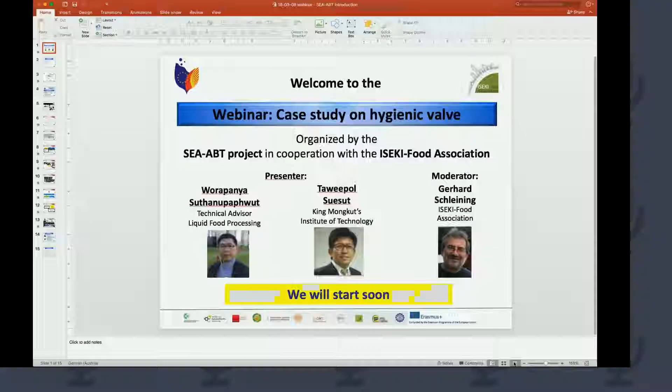Welcome to this webinar. It is given in the frame of the European Capacity Building SEA-ABT, the Southeast Asian Academy for Beverage Technology, and we are using the webinar system of the Iseki Food Association. The topic of today is about the design and use of a hygienic mixed-proof valve, and it is given by Worapanya Suthanupaphwut. So sorry for the pronunciation, but it's very difficult with Thai names. And also this presentation is given in Thai because it's mainly for the Thai people, but it will also be translated by Taweepol Suesut from King Mongkut's Institute of Technology.

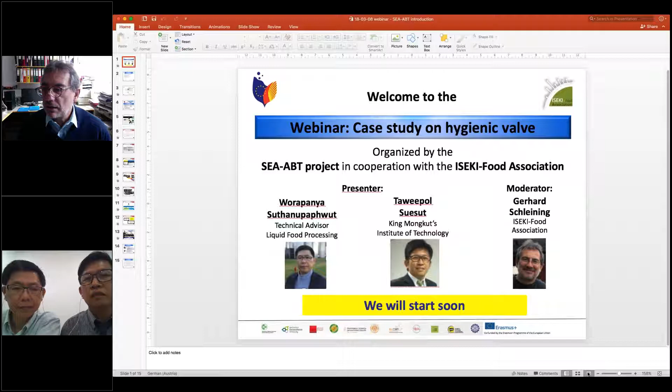Sorry. I hope you can see the presentation. I'm not sure if you only see the first page or if you can also see now the second page, because on the screen it does not appear. Chit, which page do you see now on the screen? Do you see the agenda? Let me check. Or just the front page? Just the first page, not agenda. So, I see only just the first page. So now I think you see the agenda, correct? Okay. Yes, that's right. So if something does not work, just interrupt me.

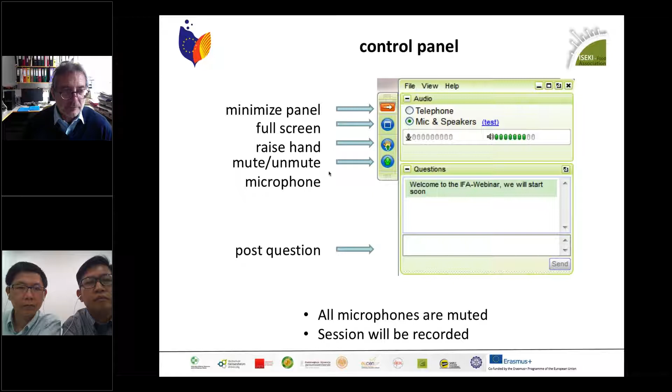Now coming to this project where this activity is carried out, it's in the frame of this SEA-ABT project. It's a capacity building project for Thailand. It's coordinated by BOKU, by myself, and it's implemented by the Kasetsart University by Dr. Sasitorn Tongchit. I'm also here representing the Iseki Food Association because we are supporting this project. We are also partner of this project, and we are supporting these activities with the e-learning platform and with this webinar system.

Just a few words about the Iseki Food Association. Some of you may know about this. This is an independent non-profit organization. It was registered in 2005 after several thematic network projects in order to maintain all the outcomes of the different projects. You can see from this slide that there were quite a huge number of partners involved in these thematic networks. For example, Iseki Food 2, we had 113 partners from 25 countries. And later on, we also could involve other partners outside of Europe from all the 5 continents. So this is where we get also the connection to the Thai universities. And in the meantime, Iseki Food Association is also organizing and participating in other projects, and one of these projects is this SEA capacity building project.

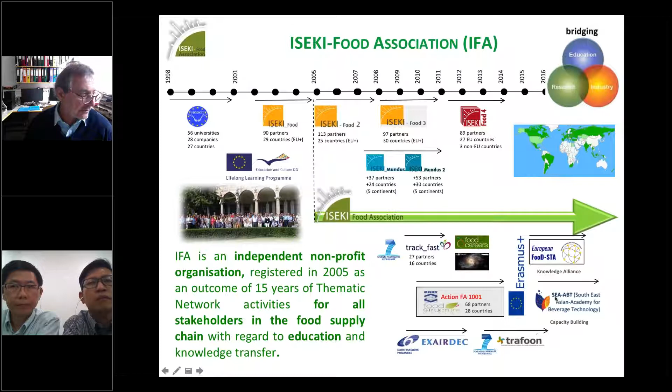This project is a 3-year project, started in 2015 and will end this year. It has a budget of 1 million euro, and we are 9 partners. The aim of this project is to support the Thai universities to establish an education concept for the beverage sector and to improve also the training equipment. By this, we are supporting the Thai companies and stakeholders in the beverage sector, so it's easier for them to find qualified persons, because before this project, the companies had to send their employees to Australia, US, or Europe, and now we are implementing some trainings in Thailand so more people can be trained in this sector.

And also another aim is that we want to build an organizational infrastructure for knowledge transfer and collaboration. We call this the Beverage Academy, which we want to implement. These are the partners. In Thailand we have Kasetsart University, then King Mongkut's Institute of Technology, whose expertise is mainly in engineering and hygienic design. Then we have Chulalongkorn University and also an equipment supplier, Patkol, from Thailand.

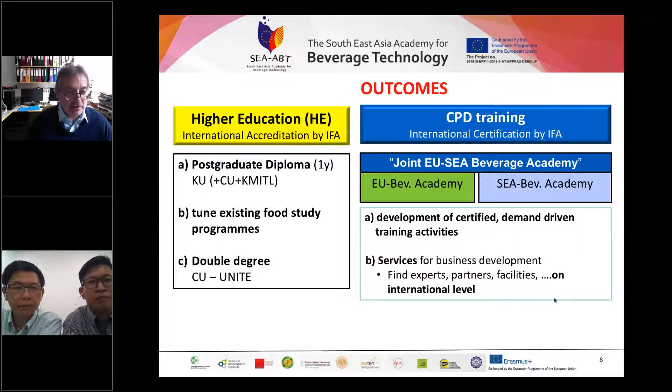For the CPD sector, we are going to establish this academy. There will be two parts, a European part and a Thai part, with an umbrella structure maintained by the ISEKI-Food Association to support both parts, mainly with IT infrastructure. For this academy, we have already developed some trainings. They were carried out very successfully in Thailand, based on the needs they told us, and in future we will also support the Thai industry to find expert partners and facilities on an international level.

So what we did until now: we had brainstorming sessions with the industry to tell us their needs, what kind of trainings they need. Then we made a selection and defined specific topics, and the trainers were trained in Europe, with a training visit at different places. Then the courses were developed. Some of them have been tested, and some will be improved. At the end, they will also get certification to show the high quality of these trainings.

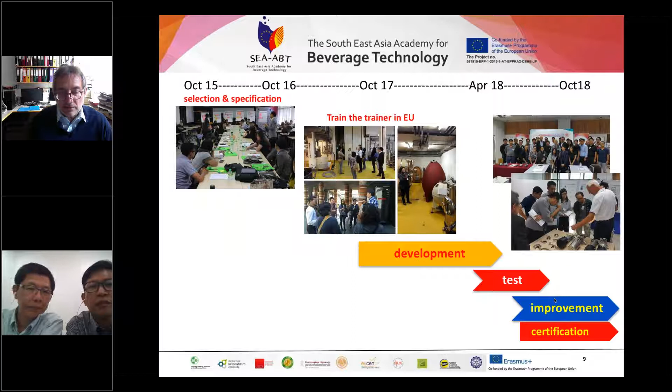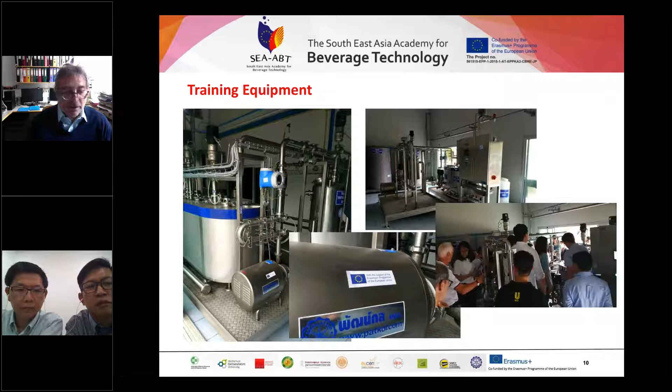These are some pictures of trainings which have been carried out. For example, this is a training from last year on hygienic design, mainly organized by the EHEDG. Important for these kinds of projects is that one third of the budget goes to the target country to buy equipment they can use for trainings. This is an example of a CIP cleaning device which was bought with this project and is installed and maintained at King Mongkut's University, so they can use it for CPD training and for their food study programs.

Again, this is the structure of the academy. We will have two parts, one in Europe and one in Thailand. The academy will also be open to non-partners of this project: universities, companies, not only food producers but also equipment suppliers, training providers, professional associations, governmental and non-governmental organizations. What we expect from these members is that they help us continuously identify the needs, accept students for diploma work and internships in their companies, and be involved in giving lectures at the universities and for continuing education.

For example, our speaker today comes from the industry and is sharing his expertise with us. The benefits of becoming a member are tailor-made, high-quality training for their needs with well-trained trainers, support in business development to find experts and partners, access to equipment they don't have, and training on new technologies in this sector.

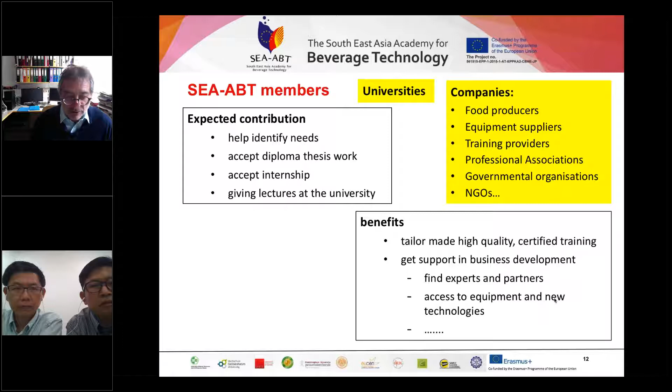So this was everything about the project. Here you can see the main actors from the different universities. And now we are coming to today's topic. If you have any questions about the project or the ISEKI-Food Association, we can discuss them afterwards in the discussion session.

Today our speaker is Worapanya Suthanupaphwut. Maybe he can introduce himself later and spell his name correctly. He is a technical advisor, especially for liquid processing. He is also a member of the EHEDG Thailand regional section, promoting EHEDG and hygienic design to the food and pharmaceutical industries. He has already given several trainings in face-to-face workshops, and today also in a webinar. Also, Professor Dr.

Taweepol Suesut, he is chair of the Instrumentation Engineering program at the Department of Instrumentation and Control Engineering at King Mongkut's Institute of Technology in Bangkok. He is chairing, together with Dr. Navabhadra Nunak, the Thai regional section of EHEDG, and also he is promoting hygienic design to Thai food and pharmaceutical industries, and he is also trainer in several workshops.

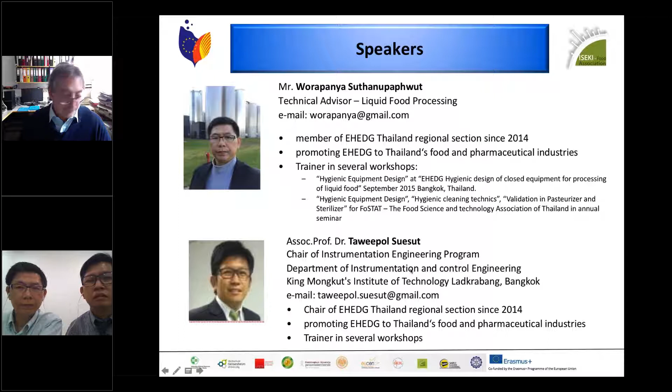Okay, so then we come to the topic. It's a case study on a hygienic valve. It will describe the basic hygienic design, how it should be designed and how it should be used in liquid processing. This type of valve is very important, because in liquid processing it can happen that one part of the plant is cleaned while in another part of the same plant processing is going on, and it has to be avoided that the cleaning agents contaminate the product. With this kind of valve, this can be achieved very well.

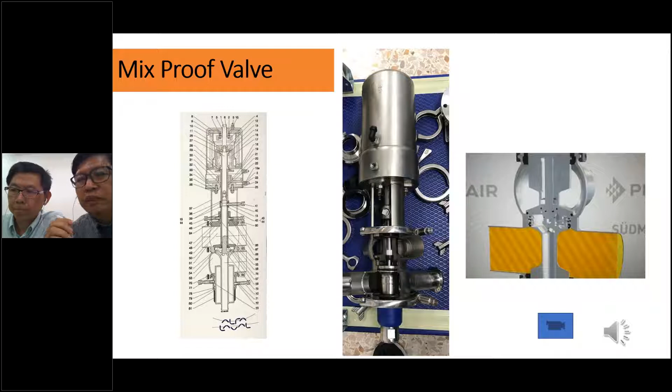The gasket or seal is made from elastomer or plastic, kinds of polymeric materials.

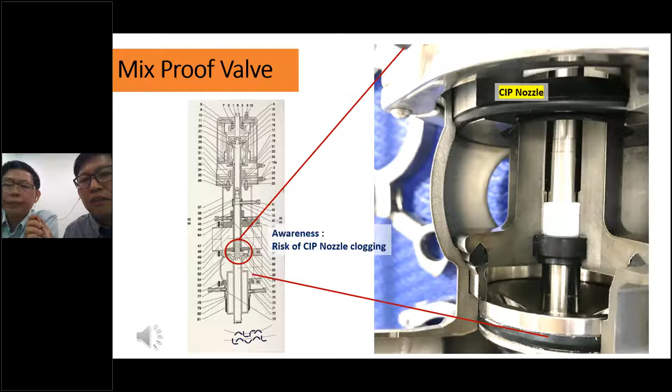Thank you for your attention. This is my presentation. Any question? Thank you very much for your nice presentation. I think it was very clear and you had very good pictures.